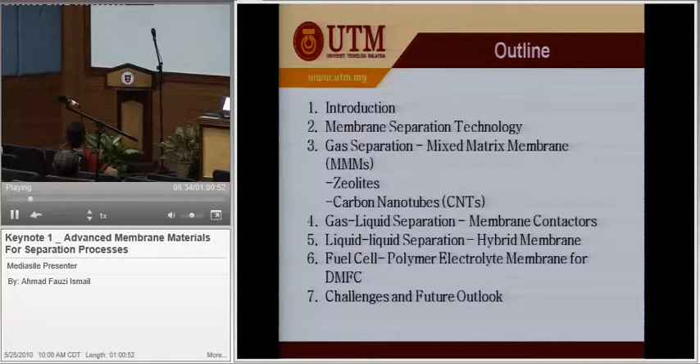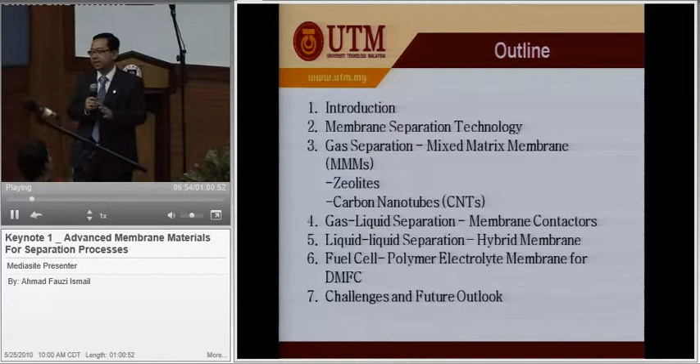Because my background is petroleum engineering, or in Malaysia, they call it orang minyak. So, to be acquainted with material like membrane, of course, it is very, very naive for me at that time, right? Just bear with me that I am not a mechanical engineer. I am a half-hearted chemical engineer, and I am one foot in material engineering. So so-called I am master of trick, expert in nothing. Right. This is some outline of my presentation.

This presentation is actually a collection of what has been done or ongoing in my lab. So I will share with all of you what we have done in our lab in the last 10 years or so: membrane technology, gas separation, zeolite, carbon nanotubes, gas-liquid separation, membrane contactor, liquid-liquid separation, hybrid membranes, materials, fuel cell, polymer membrane materials, and challenges and future outlook in this technology as a whole.

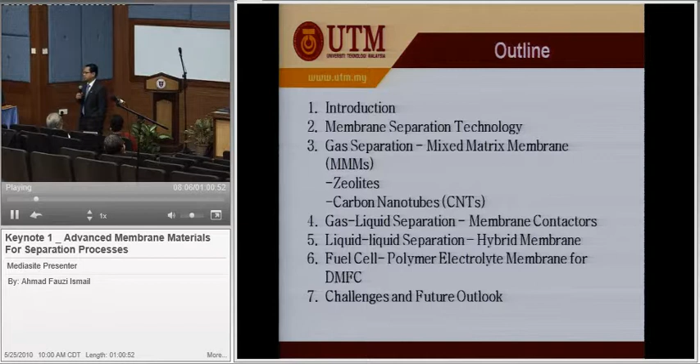Now, as an introduction, let me brief you about the importance of separation processes. Membrane is actually part of the worldwide separation process technology. So far, about 30% to 70% of the capital cost goes to separation processes worldwide, regardless of the technology being employed. Many people know about distillation, absorption, pressure adsorption, temperature adsorption. All these are considered separation processes, and it consumes up to 70% of the capital cost.

And it is estimated that about 5% of the total energy consumption in the United States and Canada is attributed to separation processes. Mind you, in the RM10 coming soon, energy research is going to dominate. This is the clue given to everybody. For those who would like to capture lots of funding, please get involved in energy-related, material-related research for energy application.

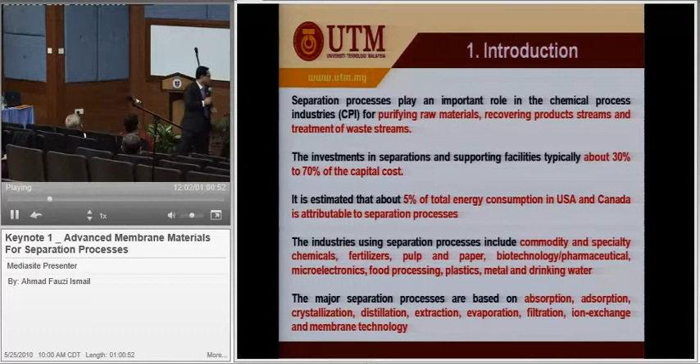Now, why membrane? Why are people talking about membrane? Maybe in UTHM there are a few active groups like Dr. Zawati, and soon to be my student, going to be Dr. Madia Hatijah, also doing membrane. Many people ask, why do you do membrane?

You know, membrane is actually not new. The membrane phenomenon started in 1850, 1860. But that phenomenon stayed as a phenomenon. It was not used for commercial purposes until 1920 in Germany, where they used it for bacterial separation. Not until the 1950s, 60s was it used for water treatment and treatment of kidney failure. People talk about hemodialysis. In dialysis, the heart of that system is actually a membrane.

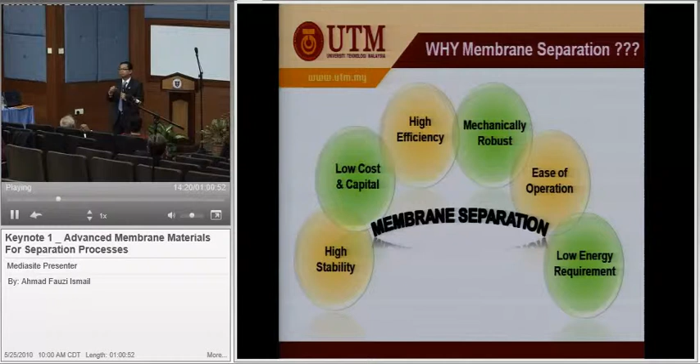Mechanically robust, if talking about ceramic membrane. And ease of operation: people used to talk about hands-on. Membrane is hands-off, everything automatic. Low energy requirement: we only need one pump, the rest are stationary. If you are using distillation, energy consumption, vibration, and lots more. That's why in America during the George Bush era, $1 billion USD was pumped into the development of membrane fuel cells. Now, membrane fuel cell has become an R&D phenomenon worldwide.

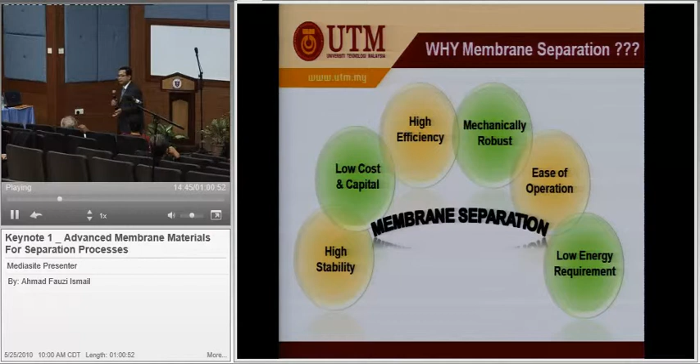Now, scientists and engineers are often fascinated by membranes because of the delicate structure, 0.1 micron thickness, that does all the magic separation processes. We are not talking about very thick, 0.1 micron, making it possible to carry out industrial separation processes. This is where engineers and scientists are really fascinated. And you know, the best membrane in the world is in our body, our kidney. There's no spare part.

You know, since the birth until today, you go to any hardware shop, no spare part, brother. No spare part. So be very careful.

Now, just to give you an overview of application of membrane and why people are now concentrating their efforts toward developing this viable technology. Because number one, of course, people talk about business. The business in membrane technology is lucrative. Yeah? Multi-billion. Because it spans from industrial, petrochemical, environment, and medical. When you go through all this list, then we know every day we are dealing with membrane. I don't need to go one by one. There's so many.

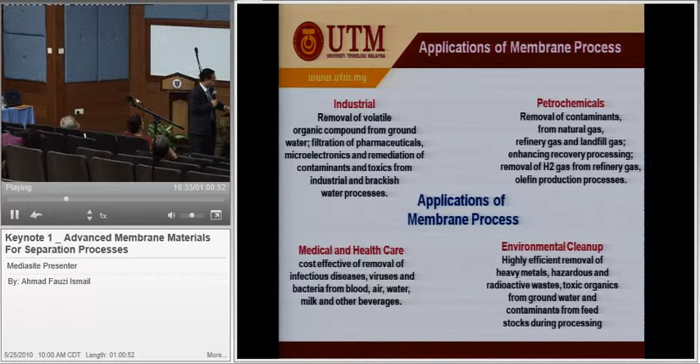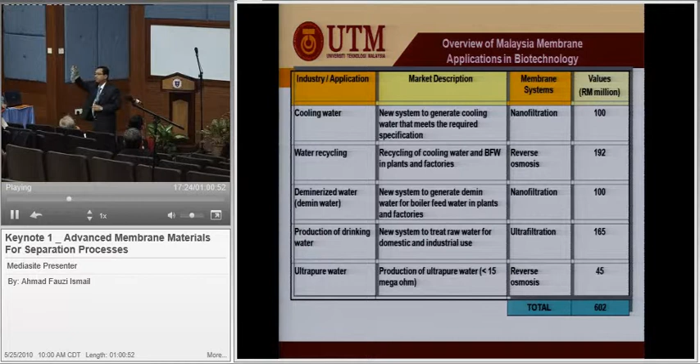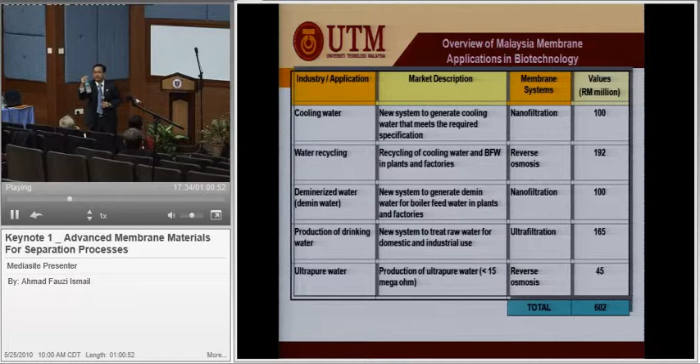Ultra pure water, drinking water, demineralized water. You know that this water that I'm going to drink is more expensive than the oil. It's 500 ml. It costs you 1 ringgit something, right? You go to the petrol station, 1 liter only 1 ringgit 80 cents. So if this becomes 1 liter, it becomes 3 ringgit. So the water is much more expensive than the oil. Betul tak? Betul lah. Okay.

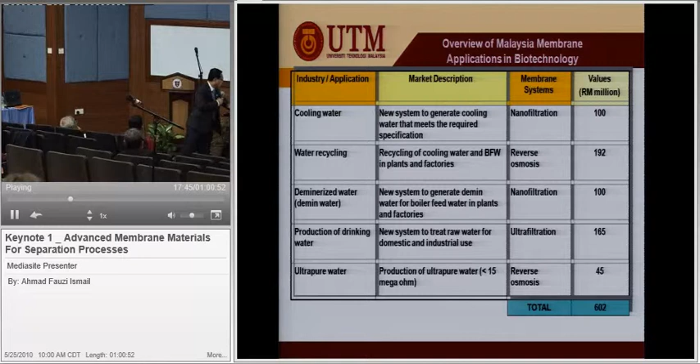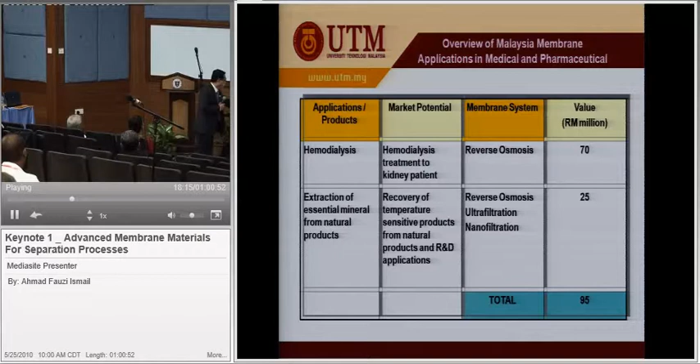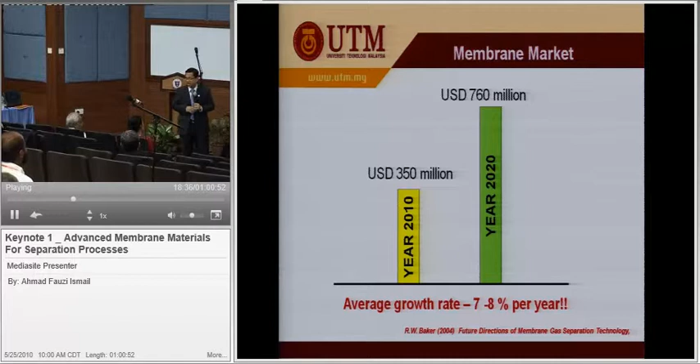And then quickly, the world market. The world market in 2010 is estimated to be 350 million USD. But in 2020, it's going to be 760 million. And the average growth rate is about 7 to 8% per year. It's very, very high for such a very new technology. Let us see about this.

So when people would like to do research or do some business in this technology, you have to have a lifetime forecast, projection. We don't do research for the sake of sok sendiri, you know, self-satisfaction, self-pleasure. We have to have this kind of projection so that whenever you are graduated or whenever you would like to embark into a business life, inshallah you are not going to fail. Otherwise, it's a big problem.

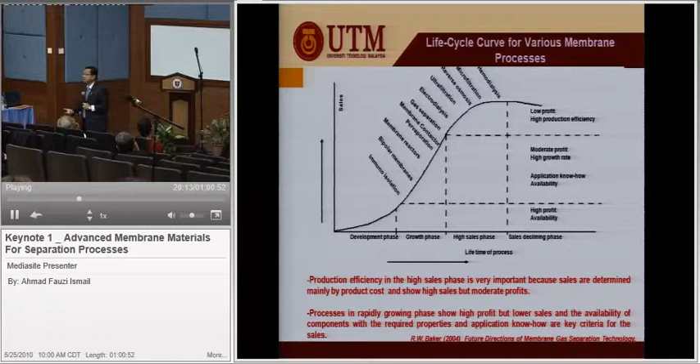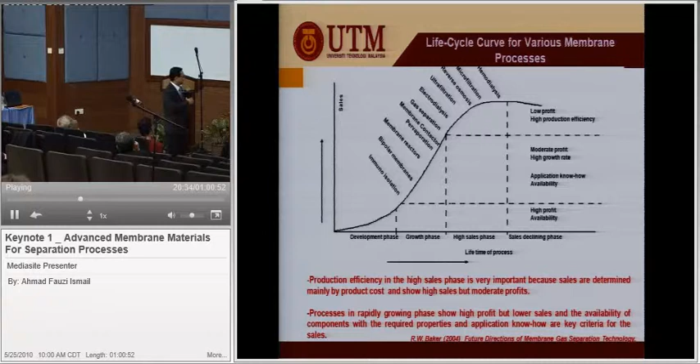Petrochemical industries, food and beverages industries, they are looking into gas separation. I just include there membrane contactor. It's very new, but very lucrative. And ultrafiltration in food and beverages industries, water and wastewater treatment, and so forth. And of course, gas separation is becoming very popular nowadays.

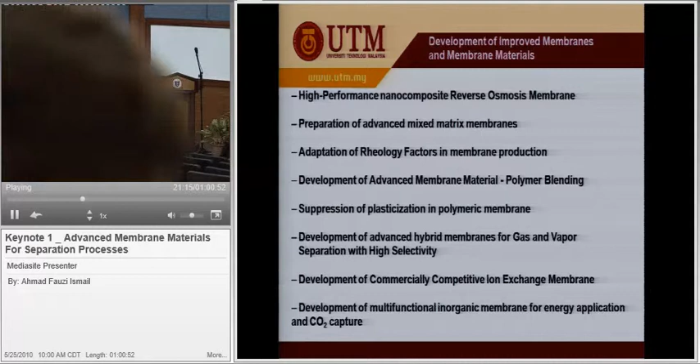So what are the developments right now in order to improve materials? First, development of high-performance nanocomposite reverse osmosis. Afterward I'm going to tell you about the merit between polymer and inorganic material. How are we going to do that? Preparation of advanced mixed matrix. This is a word in membrane technology where we disperse inorganic material into the homogeneous polymer material. So we call it mixed matrix, which is actually similar to the nanocomposite.

Adaptation of rheological factors in membrane production. Rheology, mechanical engineers also learn about rheology. Rheology is extremely important. I got my PhD in rheology. By studying rheological factors in membrane, I got my PhD. And development of advanced material, polymer blending, is a huge area to study in order to improve this material.

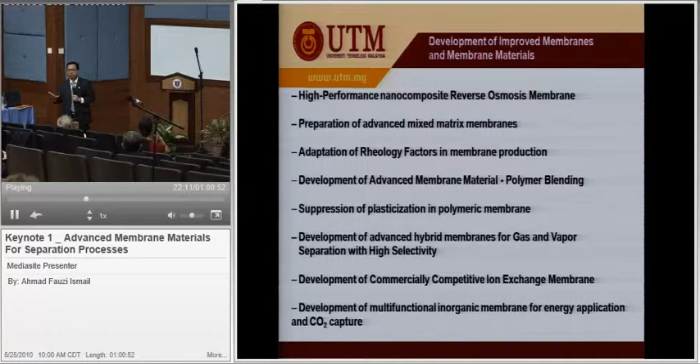Suppression of plasticization in polymer material. Plasticization means the change of structure due to the presence of some other component, like in gas separation, a polar gas like CO2, which will alter the physical structure of the polymer, swell, and a lot more.

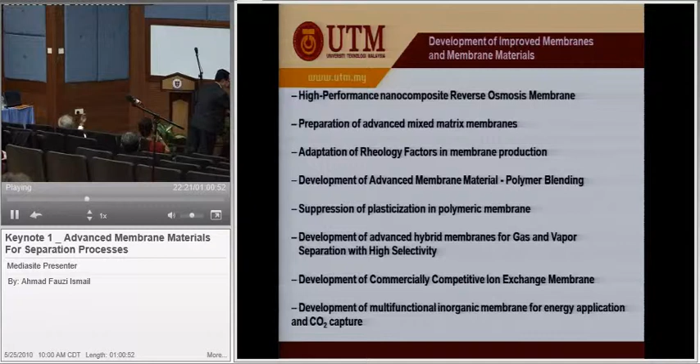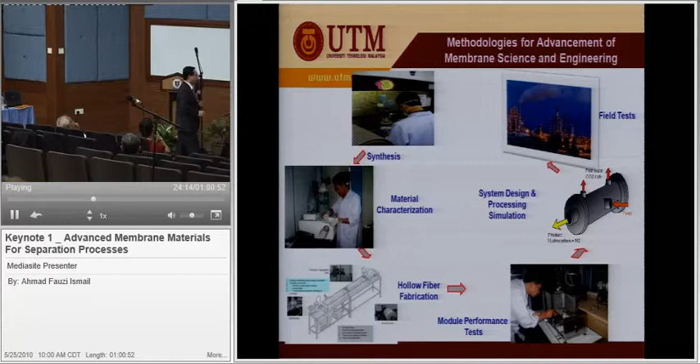And now come to the membrane itself. The membrane is actually very simple. It's an interface between the two phases, which allows certain components to pass through and retains the others. Very simple.

And you go back and check in the Holy Quran, Surah Al-Furqan, verses 51, 52. Allah Ta'ala said that in the Quran. And Surah Ar-Rahman, verses 19 to 21, if I'm not mistaken. Go and read. This technology was mentioned in the Holy Quran. Yeah?

This is how it works. Only allow certain components to pass through and retain the others. So, the performance will be determined by how fast it allows that component to pass through, which is called flux, or permeation rate, or permeance, and how efficiently the membrane retains the other component, which is called selectivity, which is the ratio between the fast gas to the slower permeating gas. These two parameters determine membrane performance.

Very simple. Anybody can get PhD or masters within the specified time. No problem. Come to my lab.

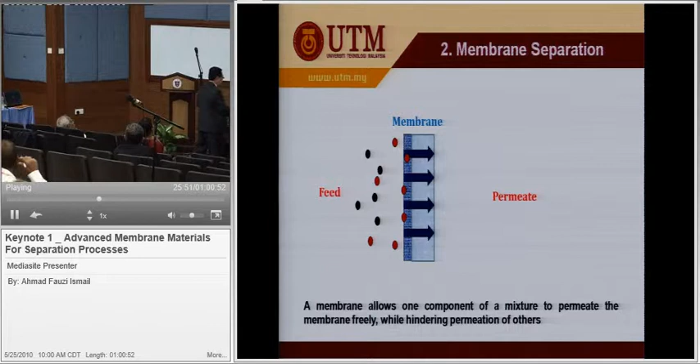And of course, there are a few separation mechanisms involved in this revealed technology, I call it, because there are many more in the Quran, yeah? Some call Knudsen diffusion, some call molecular sieving, some call solution diffusion. For Knudsen diffusion, the separation occurs along the narrow, long pore due to frequent collision of molecules with the wall. Whereas molecular sieving is based on the much higher diffusion rate of the smaller molecule, adsorption capacity is important in this case, and solution diffusion is based on solubility and diffusivity.

That's why in some processes, it does not depend on the size. Say for example, CO2 gas is much bigger than methane. But CO2 permeates through the membrane faster than methane. It's because the solubility is higher.

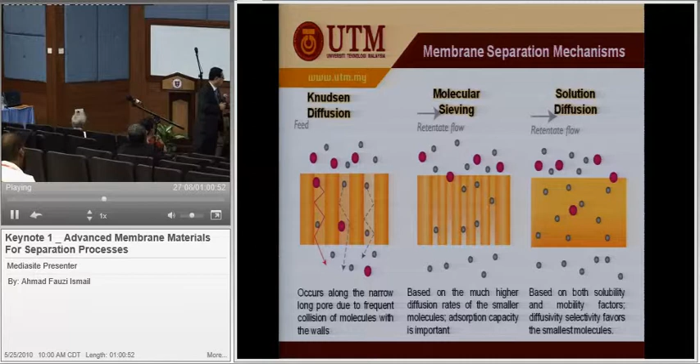Now we come to the mixed matrix. How we develop mixed matrix membrane material, which is now a booming research area in this technology. So how do we do that? The mixed matrix comprises inorganic entities embedded in a polymer matrix to obtain promising selectivity, in other words, adopting easy-processing polymeric material character with the high selectivity molecular sieving effect of the inorganic filler, like zeolite, carbon nanotubes, carbon molecular sieve. So we mix that.

So mixing occurs during synthesis. It's very simple. You prepare polymer solution, you add on zeolite, and you stir. That's it. Very simple. And why do we develop this? This is because it is suitable for harsh environments. Polymer cannot be used for temperatures more than 60 degrees C, even though the Tg is about 180 or 200. To get it done better, it must be operated below 60 degrees C. So that's why we develop mixed matrix.

Another one is the lifespan of the membrane. Polymer, very short. The highest, maybe 3 years. And the permeability and selectivity trade-off. The higher the permeability, the lower the selectivity. Meaning that the faster all of you come into this room, the less selective the guys or ladies in front who are going to entertain you, right?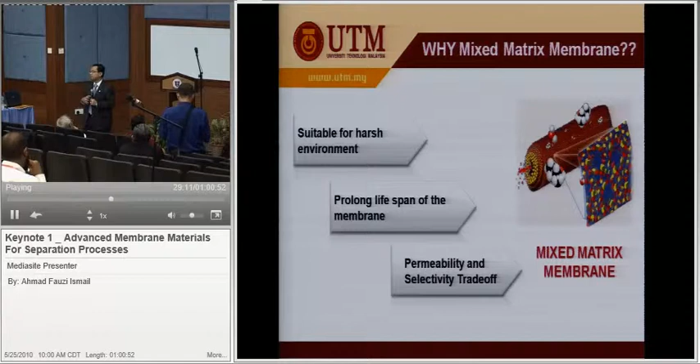If you come into this room slowly, the selectivity is very high. That means the trade-off is always there in polymer. Now, to take advantage of these two areas, polymer and inorganic, what do we do? We married them. We force married them.

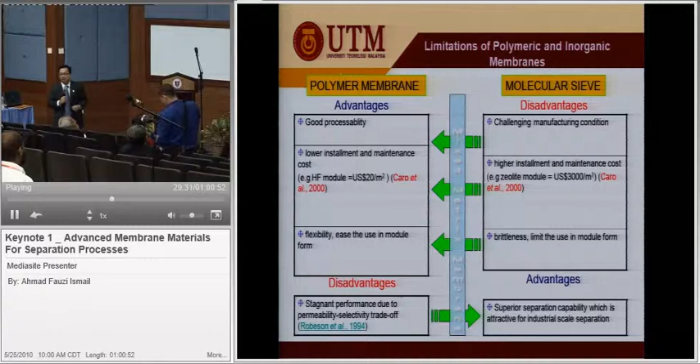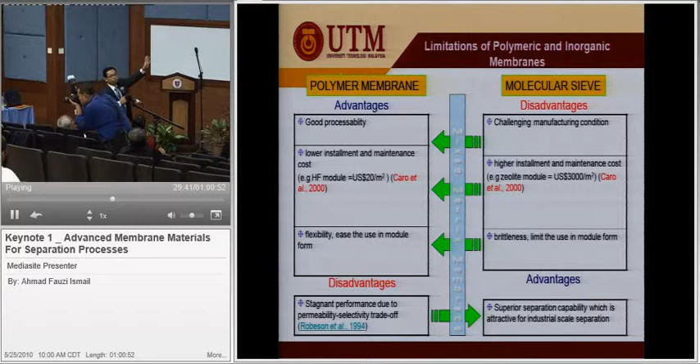But this one, forced marriage. We take only the advantages of the two different areas. We married them and they become a superior material. That's called mixed matrix.

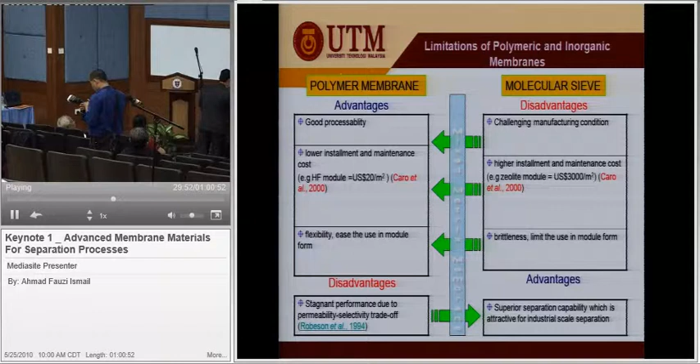However, because of the forced marriage between the polymer and the inorganic material, there are a lot of challenges. I don't like you, you don't like me. What happened? When you marry these two, there is always some form of defect that occurs. And this defect is called the sieve-in-a-cage phenomenon.

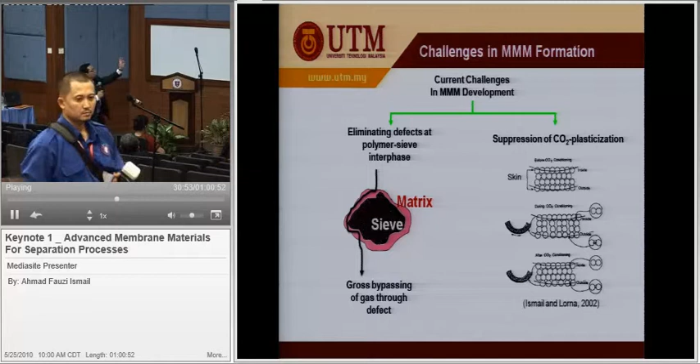So when we subject this material to any separation process, say for example gas separation, the gas will pass through a few channels: one, through the polymer; through the sieve; and bypass through the defects. So at least 3 channels. So this is a challenge, how to solve this problem, how to create defect-free membranes.

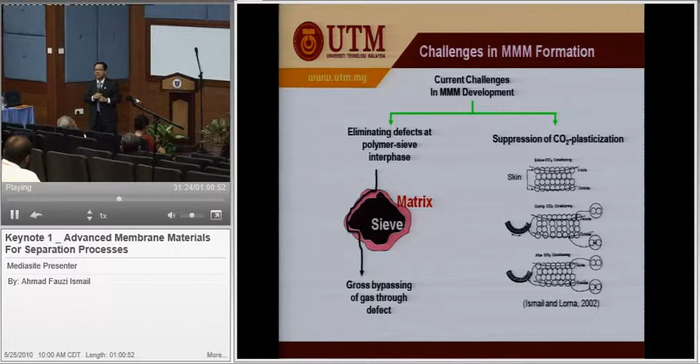And another one is plasticization. Plasticization means the enlargement of the polymer structure, stretching. If the polymer structure stretches, the water or the gas easily passes through, no selectivity. So these have to be solved during the synthesis.

Another one is fillers, and these are the fillers that are normally used. Zeolites, that is a common structure, and carbon nanotube, like a tunnel. These two are very important and cutting edge, especially the carbon nanotubes. People are talking about carbon nanotubes. Have you seen a carbon nanotube? No. Go to my lab, we produce it for you.

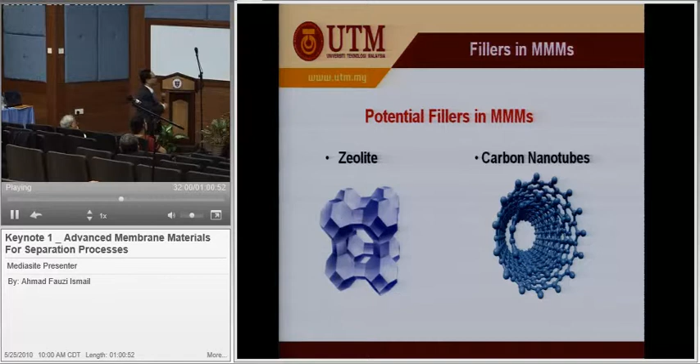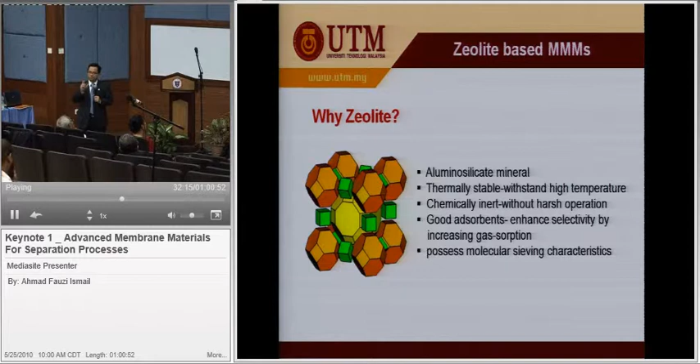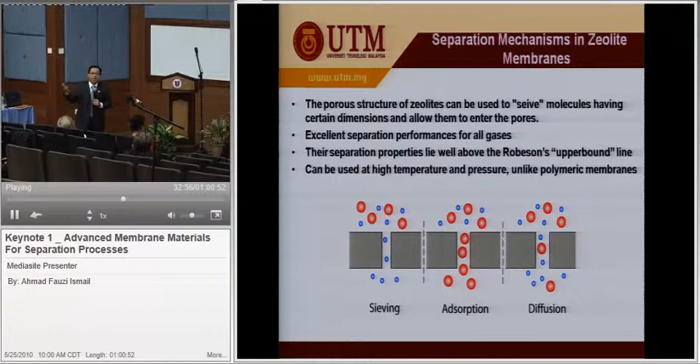Now, zeolite we use because it is thermally stable, withstands high temperature, chemically inert without harsh operation, and possesses molecular sieving characteristics. Molecular sieving characteristic is very important. It's why we use it. And the separation mechanism in zeolite is based on these 3. So, some of these mechanisms are undesired, but we can compromise by including polymer. That's how we married these 2.

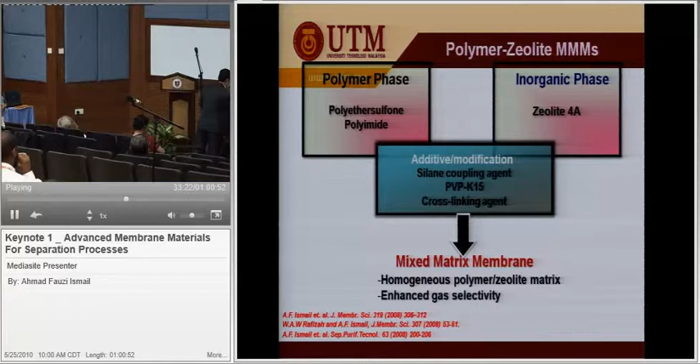Carbon nanotube, you can see the outside diameter, 17 nanometers. The inside diameter, 6 nanometers. And we produce multi-wall, which is about 16 layers. And the thickness is 5.6 nanometers. Remember, everyone can produce this. If I am from petroleum engineering, I can produce this. From mechanical engineering, you should have double the capacity.

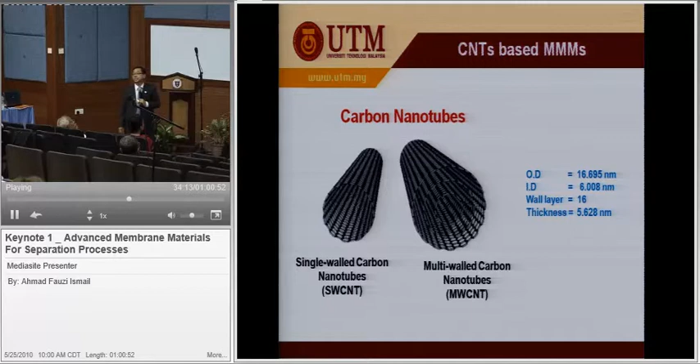Right. Why CNT, carbon nanotube? High aspect ratio. Inner tube diameter for dimension control, we can control it. Simple functionalization and dispersion in organic polymer. Mechanical strength with smaller filler content. And high surface area. This is important. The smaller, the higher. Like Professor Hafiz. The smaller, but very high.

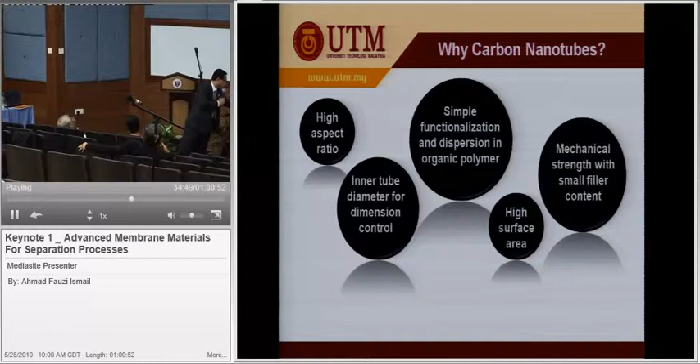This is some of the machines that we design and fabricate in the lab, and we produce our carbon nanotube using this machine. We have 2, one called catalytic chemical vapor deposition, a very simple one, just a quartz tube with this furnace. We grow the carbon in the tube. From that we can produce, but it's a bit impure. So in order to produce purer material, we design and fabricate what we call a plasma enhanced chemical vapor deposition system, for purer products. The machine is in the lab.

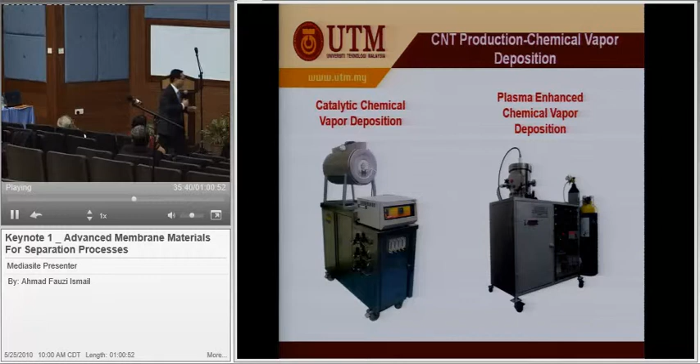So after preparation, carbon nanotube is very hydrophobic, and if you want to marry it with the polymer, you need to massage it, you need to functionalize it so that the face of the carbon nanotube can take the polymer. And then, if possible, this is our dream, to have carbon nanotubes in a very aligned manner. The carbon nanotube is a bit random. So we are going to produce aligned carbon nanotubes in polymer in the future. This is the dream of every researcher and scientist involved in this area.

Now, this is the transport mechanism in the carbon nanotube mixed matrix. So by having a mixed matrix, and with the capacity and the ability of the carbon nanotube, it distinguishes better between the desired products and the undesired products.

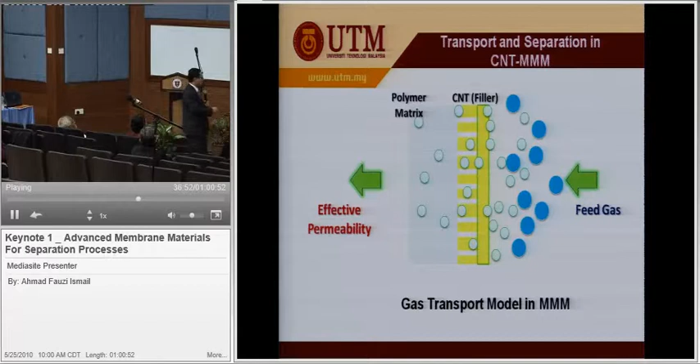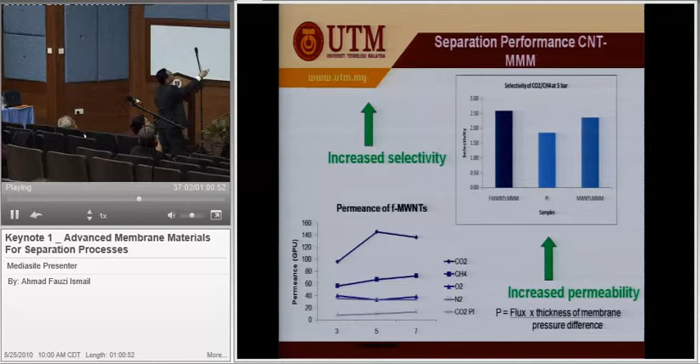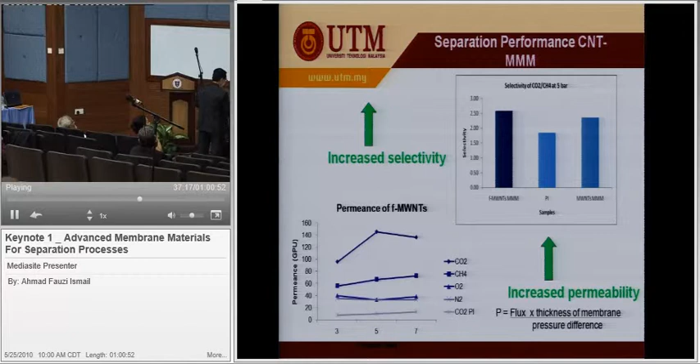Now, some of the performance data that we got from the lab, you can see here. Never mind. The upper one is for CO2, and this one for methane, and this one is the data without CNT. Huge improvement. So you can see clearly here, this is the selectivity of the functionalized multi-wall carbon nanotube mixed matrix membrane compared to the rest. You can see the huge improvement in terms of membrane performance.

But what are the challenges here? You know how to produce, you know the characteristics of each material that you want to use, but polymer undergoes a trade-off limitation. High permeability results in low selectivity. Another limitation is the ability to withstand high temperature and aggressive environments. So how to overcome this? This can become a research topic: development of a new membrane material that can withstand high temperature and aggressive chemicals.

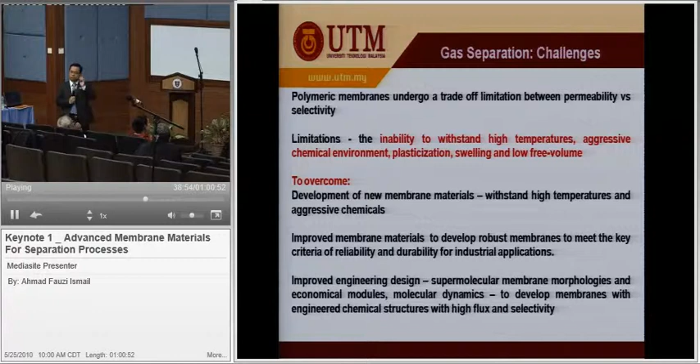Improve material to develop robust membrane to meet the key criteria of reliability and durability for industrial application. And to improve engineering design: supermolecular membrane morphologies, economical module molecular design, molecular dynamic simulation. For those who are really expert, you'd like to study from molecular architecture. So these are areas that we can go to.

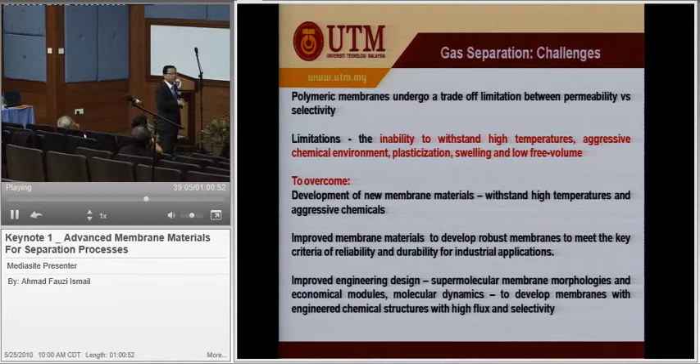Next, liquid-liquid phase separation, hybrid membrane. The process is already established, recently deployed processing and emerging technology for produced water or wastewater treatment. Not many people are involved in this. But if you know the potential, if you get close with the industries, with the oil and gas industries, you might be immediately attracted to this.

Imagine in the oil and gas platform, every day they drill. They use mud for drilling, water, and after that all this mud and water will just discharge to the sea. And now DOE, environmental DOE, imposed very stringent criteria for disposal of this produced water. And when the system is offshore, you just name the price.

Last night I had a very fruitful discussion with one of the oil giants in the world, addressing this produced water. Just name it. But you must prove it, that you can. Oil and gas, they pay you top money, but they expect top technology. Otherwise, they will cut throat.

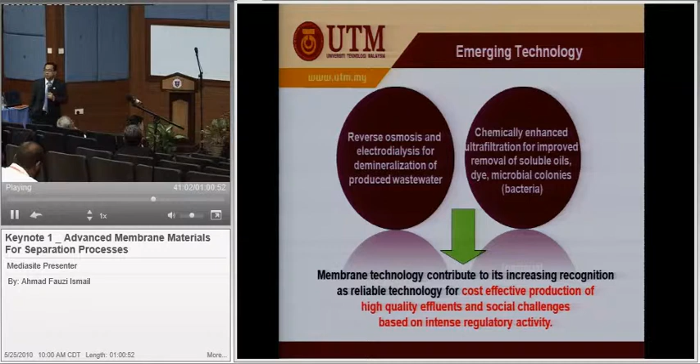Second, chemically enhanced ultrafiltration for improved removal of soluble oil, dye, microbial colonies of bacteria. And the technology contributes to its increasing recognition as a reliable technology for cost-effective production of high-quality effluent, and social challenges based on intense regulatory activity.

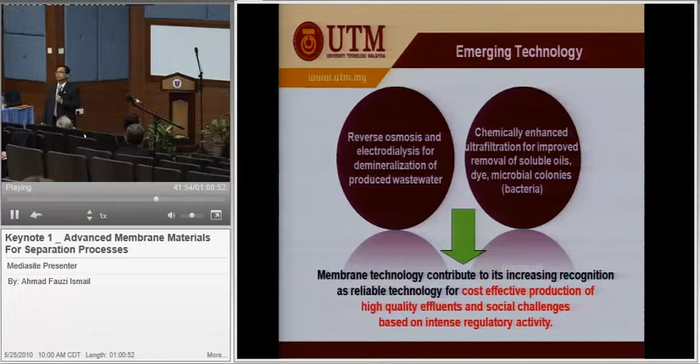If you don't believe me, go to Sembrong Barat, dekat sini Sembrong. Those who know Sembrong, you go there. I've done some study, some plant audit there. No wonder this area is called Air Hitam, because the water is really hitam. You go there, I've done it, my report is about that thick. And this is some of the system that we developed in the lab.

This one is Hatijah's, Hatijah punya. That one is for submerged membrane bioreactor. So all of my students, my staff have to develop their own system. They test their own system, produce their own data, publish their own data. Otherwise, no PhD, no master.

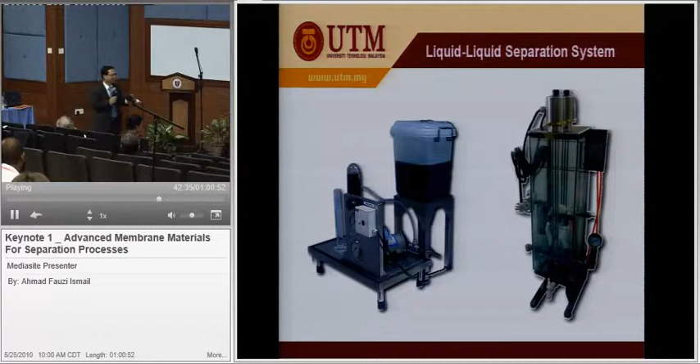Now this is some of the electron microscopy images of our membrane. So modification in the membrane matrix by addition of inorganic compound, titanium oxide. UTHM student conducted this, and this is the data. It was just recently published in Desalination, not because I'm on the editorial board, but because of the quality of the paper. We got 98% rejection of impurities.

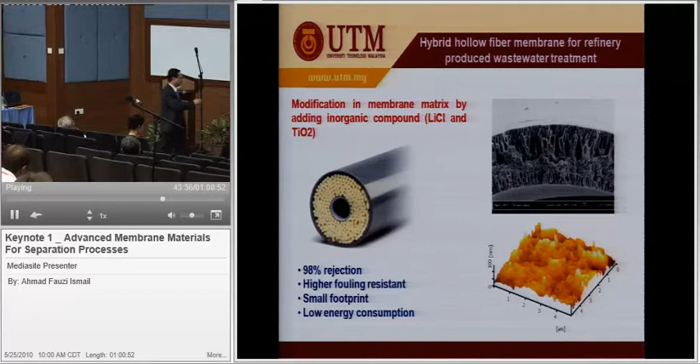And higher fouling resistance because of the insertion of titanium, the filler. Small footprint, very small. Very small, and lower energy consumption. I mentioned just a pump, just one pump, a very small pump. The only one.

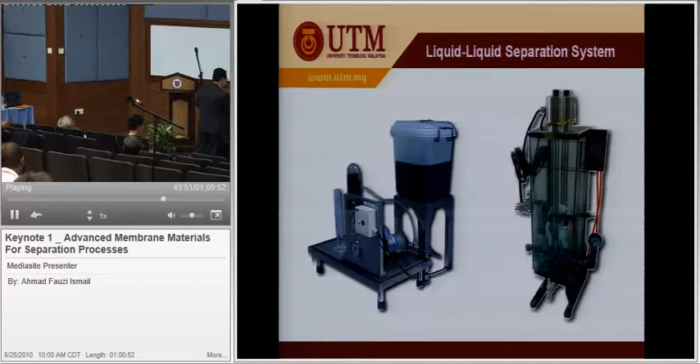Now having said that, there are a lot of challenges. In water and wastewater treatment, there are a lot more challenges than gas, because we do not know what is inside the water. There are so many compounds there. So RO will continue to be playing a major role in water treatment, employing nanofiltration and RO as a powerful tool for removing micropollutants.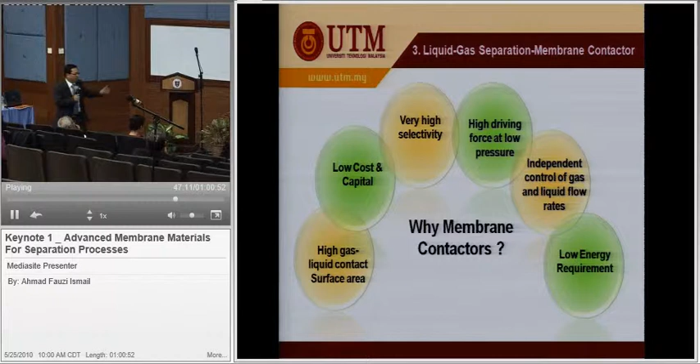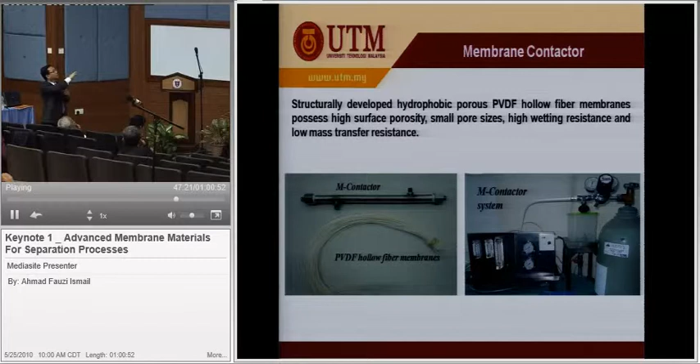How do we do that? You can see that is the membrane, the PVDF membrane. This material can withstand high acidity. Even stainless steel cannot withstand this acidity, but PVDF can. This can withstand hydrofluoric acid, which stainless steel cannot.

So we developed this kind of material, and we developed the contactor up there. We put this material inside the module, and then we pump ionic liquid. Have you heard of ionic liquid? Like ethylene glycol, which is used to cool the engine in our cars. Glycol, ethylene glycol, methylene, MDEA, MEA, they call it. We pump it into the system.

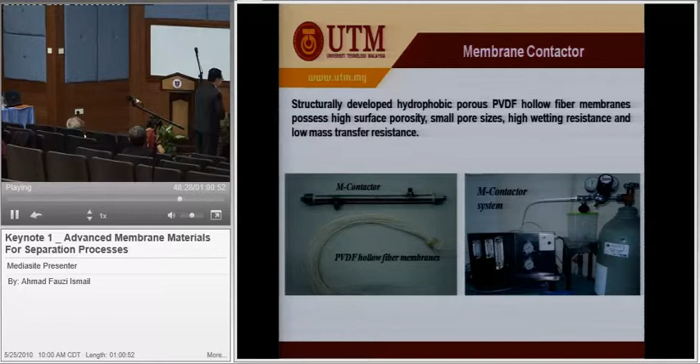So here is a graphic. What we do is pump the solution into the lumen side, the hole. The blue arrow there, we pump in the liquid. At the same time, we force the gas. This is a porous membrane, and this is the absorption liquid, which is the ionic liquid.

The name sounds fancy, ionic liquid, but it's just like ethylene glycol, diethylene glycol, triethylene glycol, used to absorb the bad gas, CO2. So CO2 passes through this line, the liquid passes there, and through this porous membrane, the liquid absorbs the CO2. This is a very simple, economical, efficient, effective separation, and the way forward for membrane removal of CO2 to address the global warming problem. This is the system.

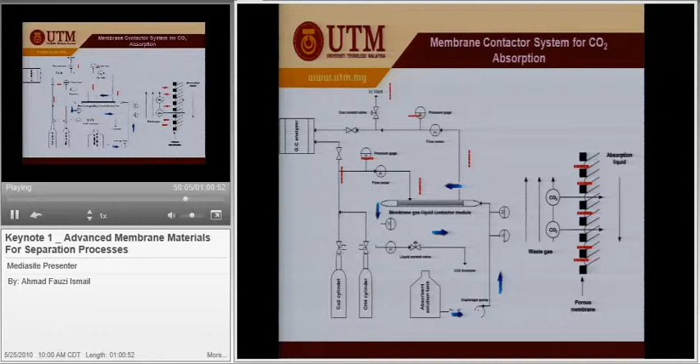So you can see we developed this technology and compared it with commercially available polypropylene and commercially available PTFE, versus our PVDF with glycerol. You see, our membrane shows very high flux, meaning very high performance.

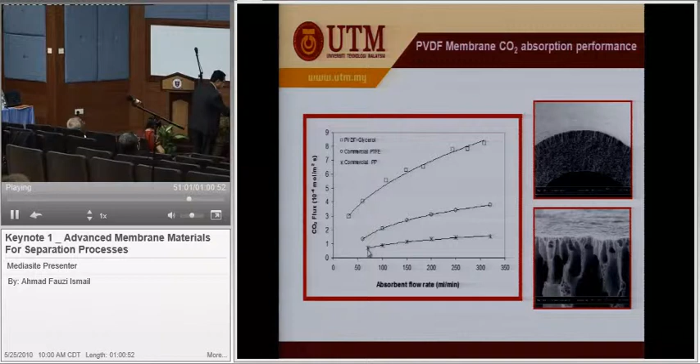Here is the structure of our membrane. You can see it's very porous. Porous means low resistance, and low resistance means high flux, with a very high integrity skin layer that is very thin, to ensure high productivity.

But there are some challenges, not many. Long-term stability of the membrane contactor upon contacting with CO2 is very important. It can be affected by wetting of the membrane and the interaction between the membrane and the liquid absorbent.

So in order to fulfill the long-term stability of the membrane contactor and commercialize the technology, there are about three things to be done. Number one, develop the membrane structure and material. Second, find the liquid absorbent properties, so somehow we use water. It's okay because I already patented it. We use water instead of other chemicals to avoid discharge. Third, economical analysis of the technology.

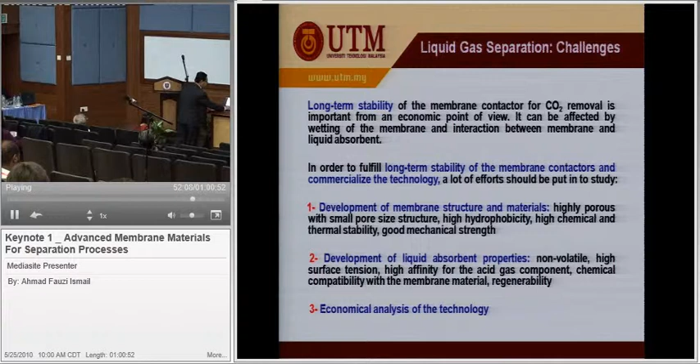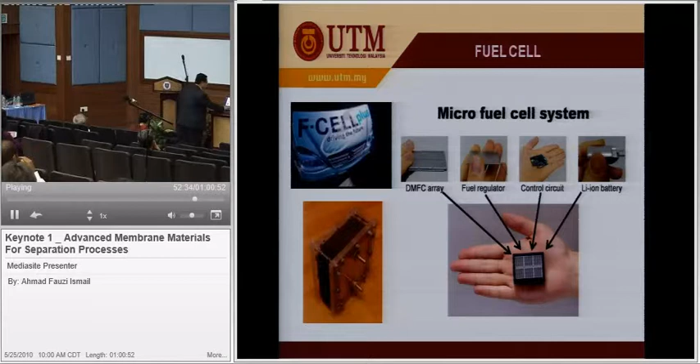Now, fuel cell. Fuel cell car, fuel cell battery, lithium ion — this is why people use fuel cell. Fuel cell can also be used to power this building, and this is how.

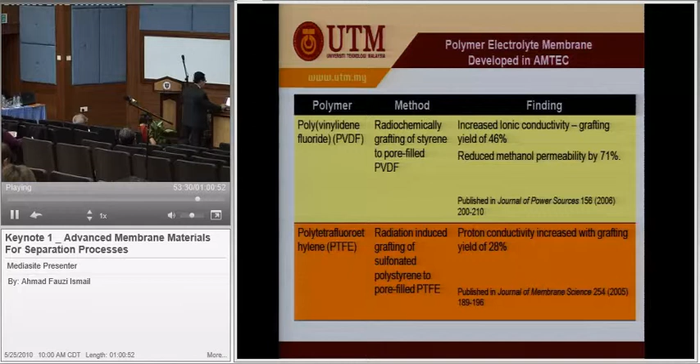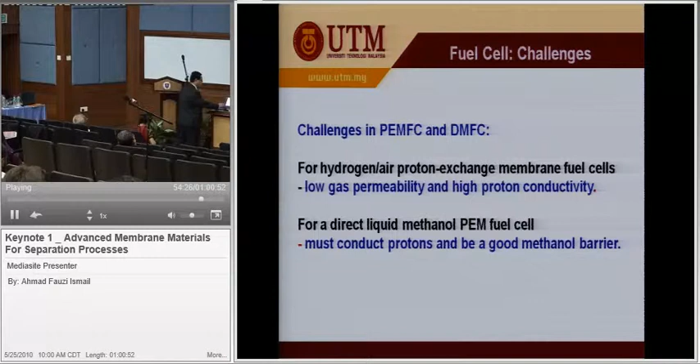Tungstosilicic acid, SIWA, was published last year. This is very recent. The challenge is to produce low gas permeability, and it must conduct protons and be a good methanol barrier.

This is the outlook, just another 5 minutes. Potential and outlook for membrane technology as a whole.

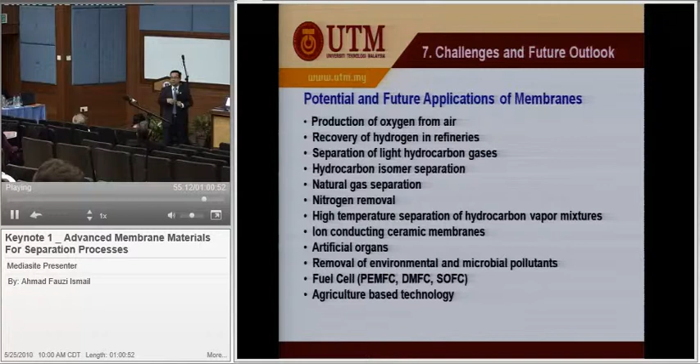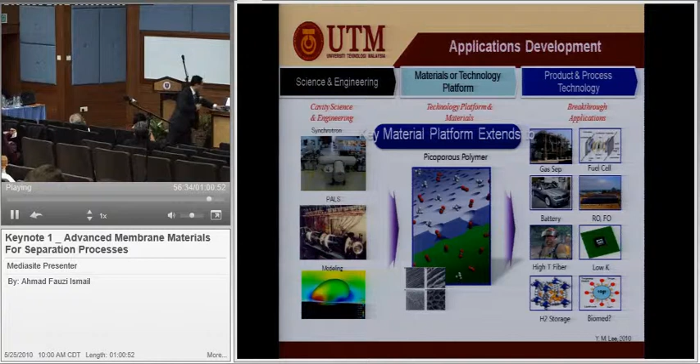So having gone through this, then you become a very successful researcher. Now this is my last slide. The problem in certain technology, I'm talking about membrane technology, is the translation phase, membrane to the solution, or translation phase for any other technology to the solution. Why do we have problem? Why do we have problem translating certain technology into the application? Because number one, we don't know the problem.

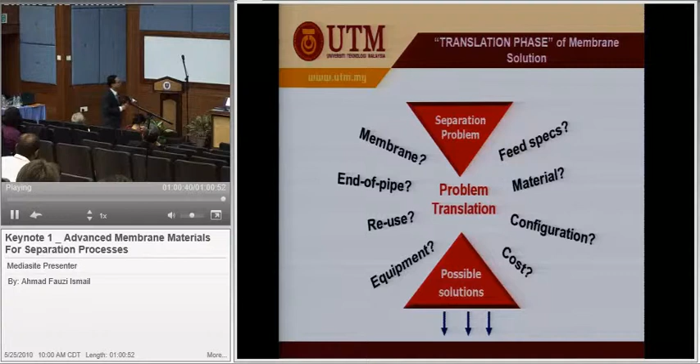And at the end, membrane is not good, distillation is not good, any other technology coming to our country is not good. And what is good? Just making money for them. Now, I don't want to do that. Then, that's it - the end of my presentation. Thank you very much.